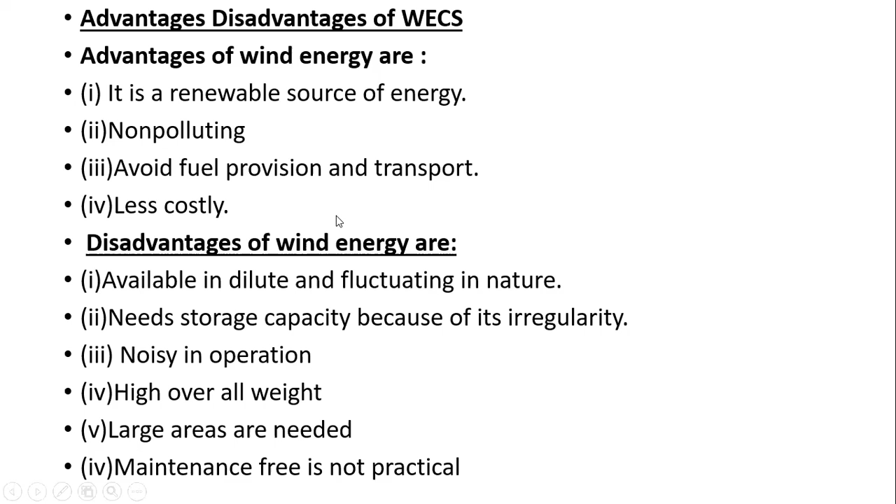So these are the advantages and disadvantages of the WECS, wind energy conversion systems. Next one.

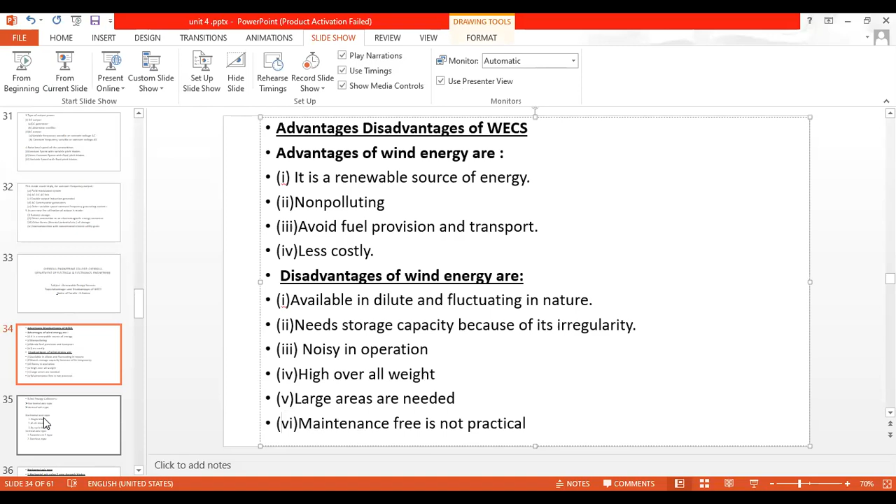So now we will see the wind energy collectors. First we will see what a wind energy collector is. This is nothing but a windmill. We know that a windmill is a machine for wind energy conversion. The wind energy is converted into appropriate uses depending on the application we connect it to. So a windmill is a machine for wind energy conversion.

This windmill converts the kinetic energy of the wind motion to mechanical energy transmitted by the shaft. This mechanical energy converted by the wind turbine is transmitted by the shaft to the applications. If this is connected to a generator shaft, the generator further converts it into electrical energy, and thereby we get

electricity. The term windmill originally implied a mill for grinding grains. The name comes from a mill for grinding grains because it was an obvious application. This term we are still using very recently. Aero generators avoid the difficulty of the earlier disadvantages. Only in the last century have we used windmills for generating electrical power.

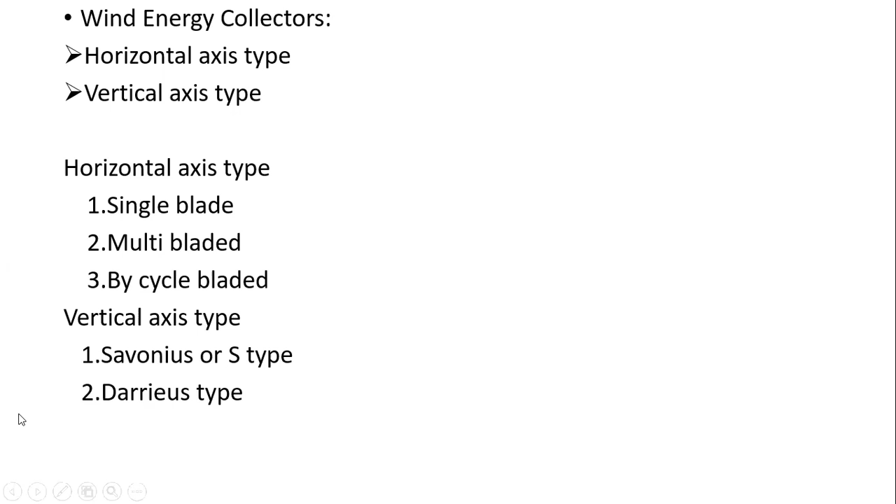First we will deal with the horizontal axis type. This is the first main classification, done depending upon the axis of rotation relative to the wind stream. In horizontal axis machines, the common wind turbine is taken with a horizontal axis. It is simple in principle, but the design of the complete system, especially a large one which produces electrical power, is complex. For small power producers it is simpler, and for large ones it is a complex design.

These have some components; individual components should be assembled. Suppose you take the individual components such as rotor, transmission, generator and tower; these should be as efficient as possible. And if you combine all this, that means if you make them all work together, that is assembled. If all the separate individual components such as rotor, transmission, generator, gearbox are coupled to each other, and once they are used, they should work effectively. That means the combination should work effectively.

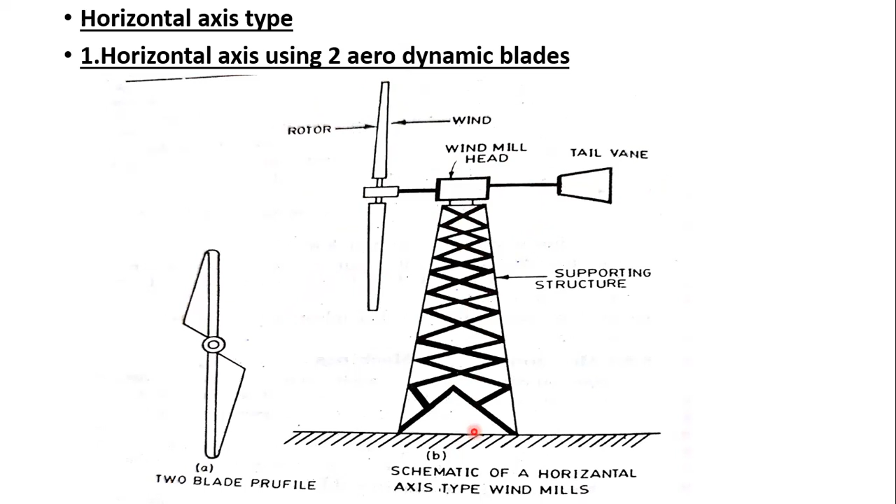This is the wind flowing here. The rotor will be rotating like this. This is the windmill head, and this is the tail vane, which counterweights the rotor blades, so it will be balanced like this, on a large tower. And the second type is a horizontal axis propeller type using a single blade only. See here, only a single blade. This is one blade.

In this arrangement, a long blade is mounted on a rigid hub. This is called a hub.

If you take extremely long blades, say about 60 meters, these long blades are mounted on a rigid hub. Large blade root bending moments occur due to tower shadow, gravity, and sudden shifts in the wind direction.

This bending moment should be avoided. So to reduce the rotor cost, the use of a low cost counterweight is recommended, which balances the long blade centrifugally.

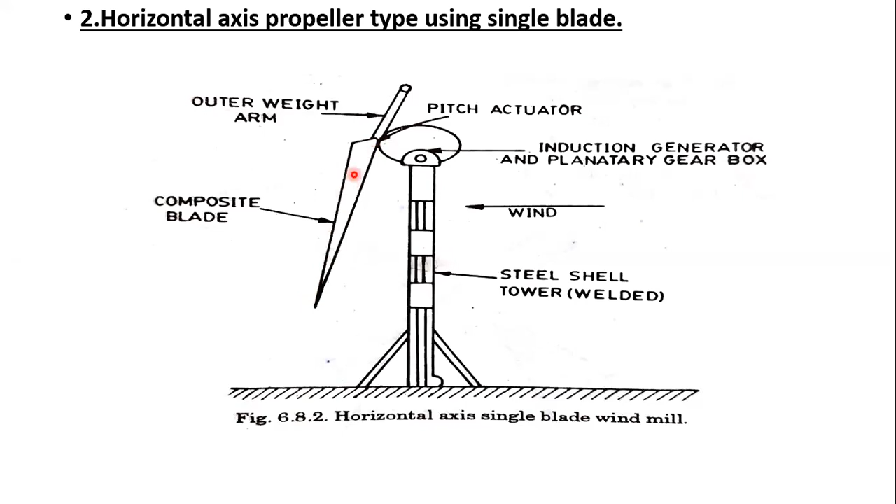Now let's see the advantages and disadvantages of using only one blade rotor. The first advantage is simpler blade controls - we can control the blade simply. This gives lower blade weight and cost, and also lower gearbox cost.

The second advantage is that the counterweight costs less than a second blade. If you opt for a second blade, it is expensive. So if you increase the blade number, the cost will increase. If you take only one single blade and put a counterweight in place of the second blade, the cost will be reduced.

Third advantage, the counterweight is inclined to reduce the blade coning, that is the blade coning shape - the blade is in a cone shape. To remove this disadvantage, we have to put a counterweight inclined in the shape of the blade cone.

Next, pitch bearings do not carry any centrifugal force - centrifugal force is not carried by the pitch bearings. And the blade root spar can be of large diameter, making it more rugged.

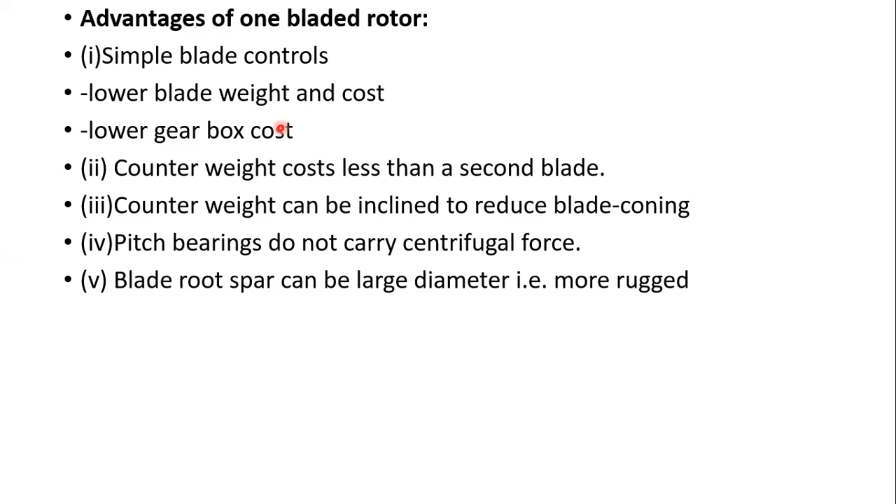Now we will see the disadvantages. First, due to aerodynamic torques, vibrations can be produced.

Second is unconventional appearance. Because of using a single blade, it is shown to be an incomplete construction.

Third is large blade root bending moment - the blade root will be bending to a large extent, which damages it frequently.

And starting torque is reduced by the ground boundary layer, reducing the starting torques.

Fifth, a 1 per revolution Coriolis torque is produced due to flapping. Using only one rotor blade, while starting and stopping, the rotor blade experiences a flapping torque, that is Coriolis torque, meaning flapping torque - an unconditional torque.

Due to the moment of bending and the blade coming in the opposite direction, there is a flapping nature. This is called flapping nature, and due to this, an unconditional torque arises. So this design is not used in our applications.

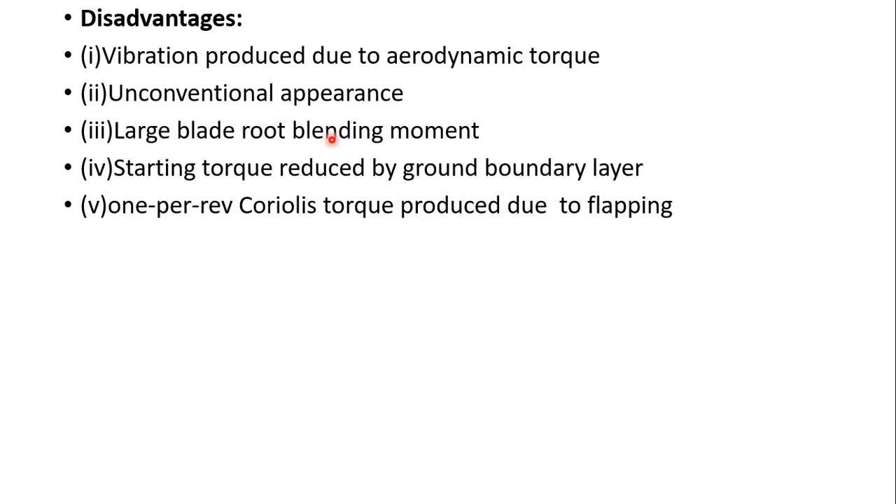These multi-blades are made from sheet metal or aluminum. These rotors have high strength to weight ratios and can operate in freewheeling operation at wind speeds of 60 kilometers per hour. They have good power coefficient, and high starting torque is attainable in this design.

One added advantage of this type is that it can be simple and of very low cost. This is the horizontal axis multi-blade type propeller.

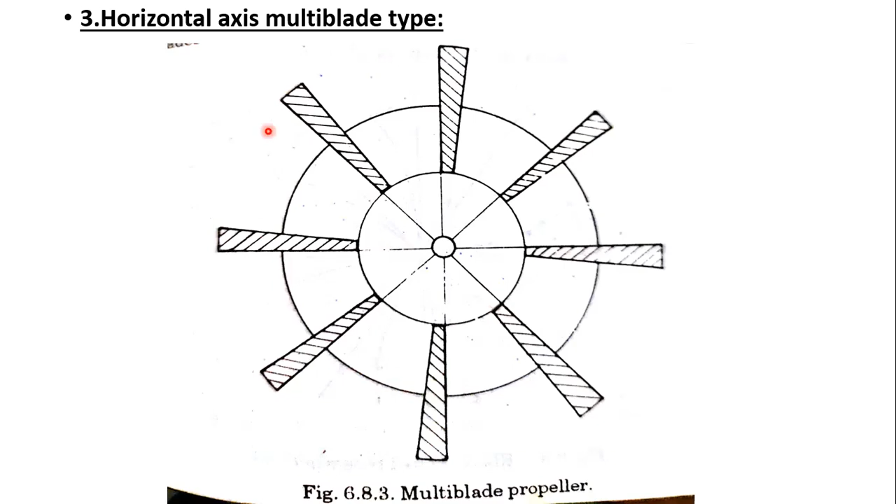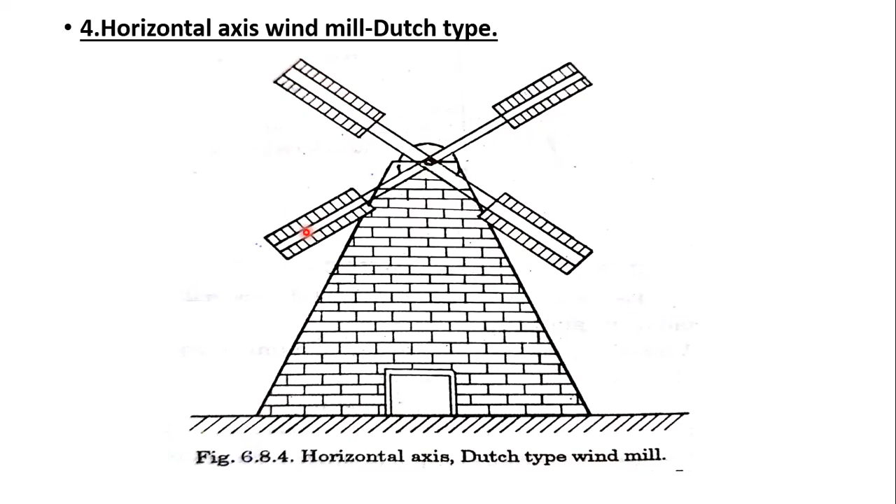Here we can use any number of sails we want, with variation depending upon the applications. These horizontal axis type machines have better performance, but are expensive in cost. These machines are used in various applications, but the two major areas where they are mostly used are electric power generation and pumping water.

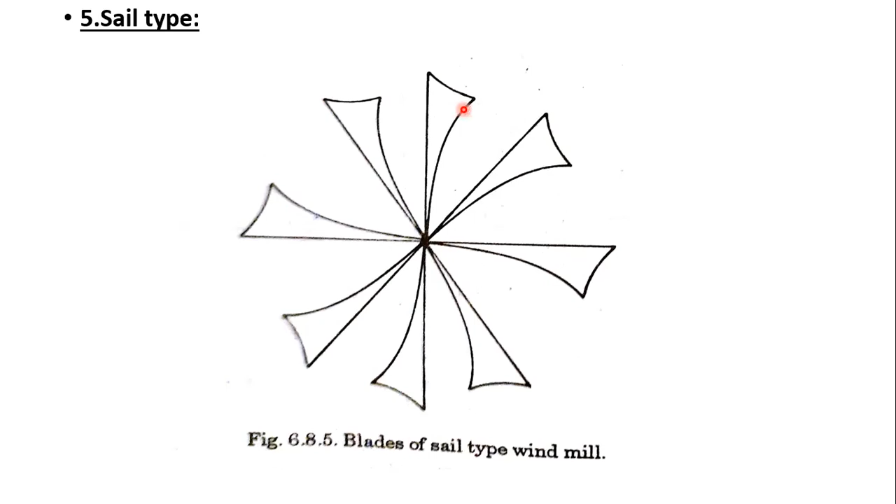Design considerations of horizontal axis machine. This is a common wind turbine we know, the horizontal axis machine. Almost all wind turbines we see are of horizontal axis type, because it is simple in principle, but the design is somewhat complex. That is the only disadvantage. If you go for a large one, the design will be complex.

For electrical power, first let's see how the rotor will be designed. The rotor has a number of blades. These blades can be formed from wood, metal, or composites of several materials, including glass reinforced plastics.

In recent days, we use blades made up of carbon fiber, because these are lightweight, flexible, and have more strength.